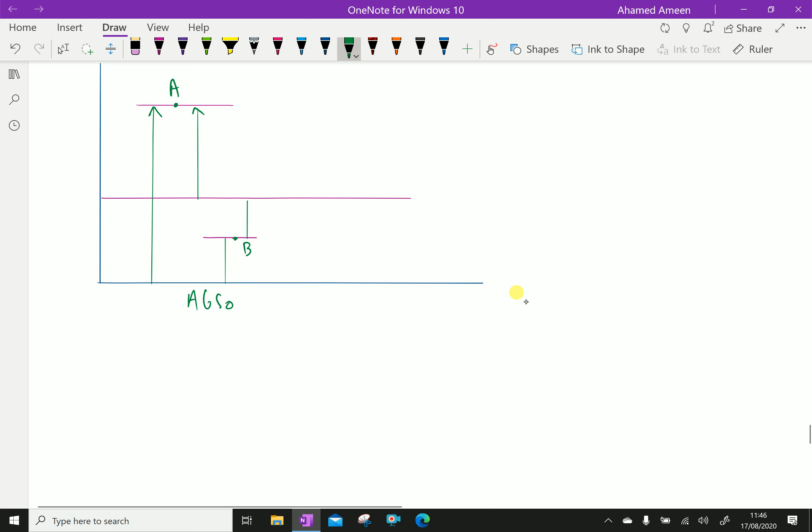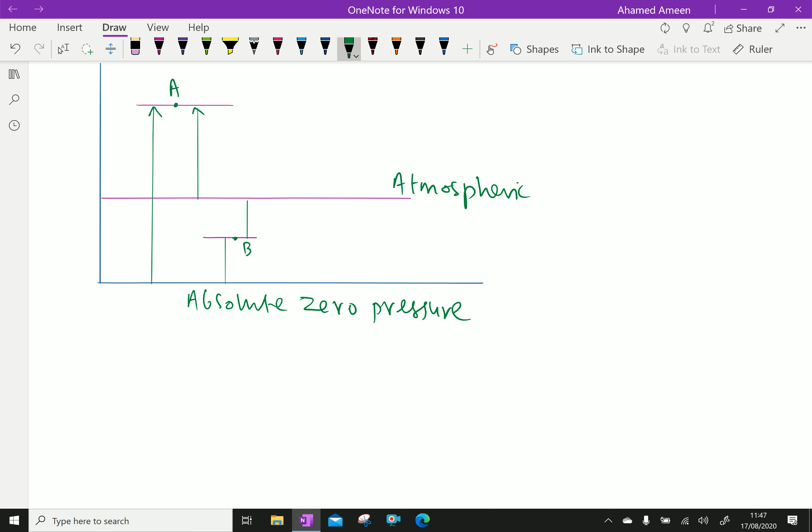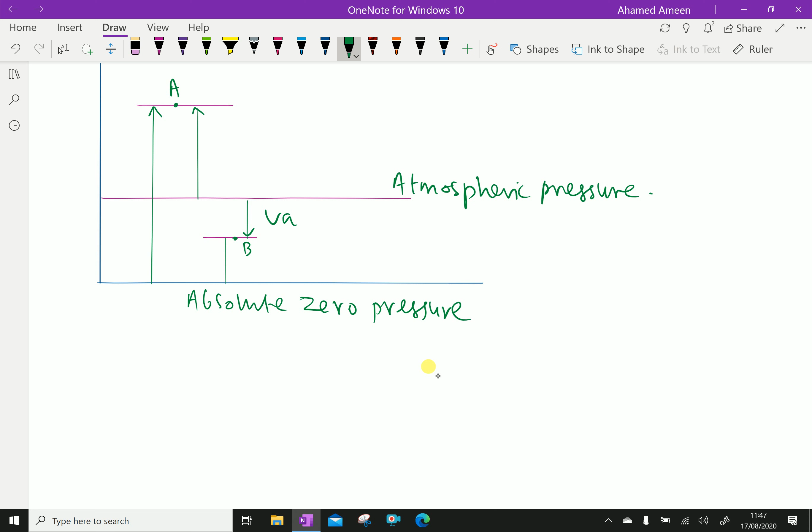Look at this figure. Let this level be absolute zero pressure. Now this is atmospheric pressure here. This one is vacuum pressure. Here this is gauge pressure. This is absolute pressure.

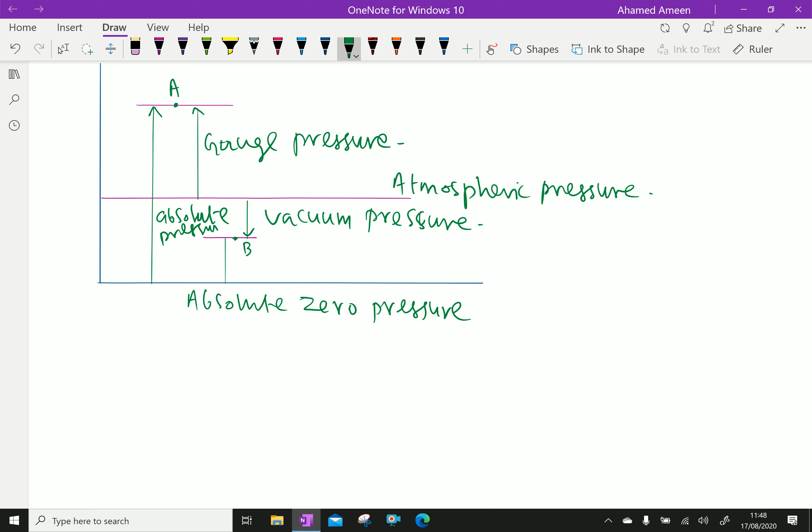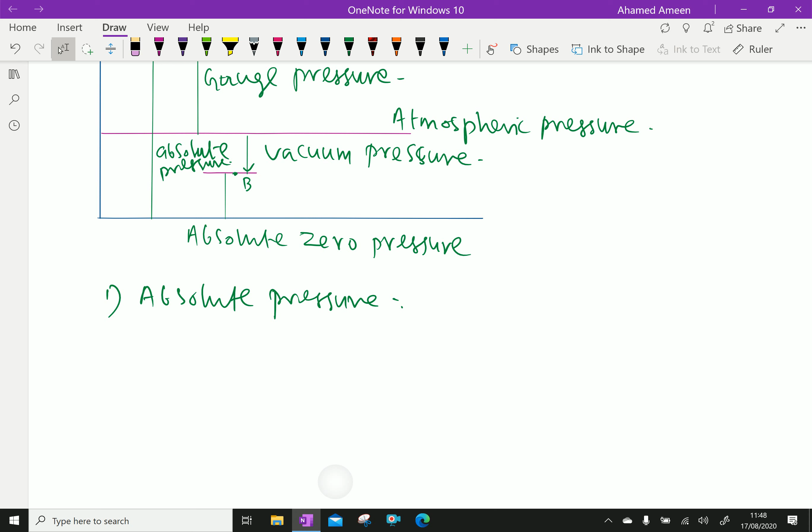Now, first we'll discuss absolute pressure. Absolute pressure is defined as the pressure which is measured with reference to absolute vacuum pressure.

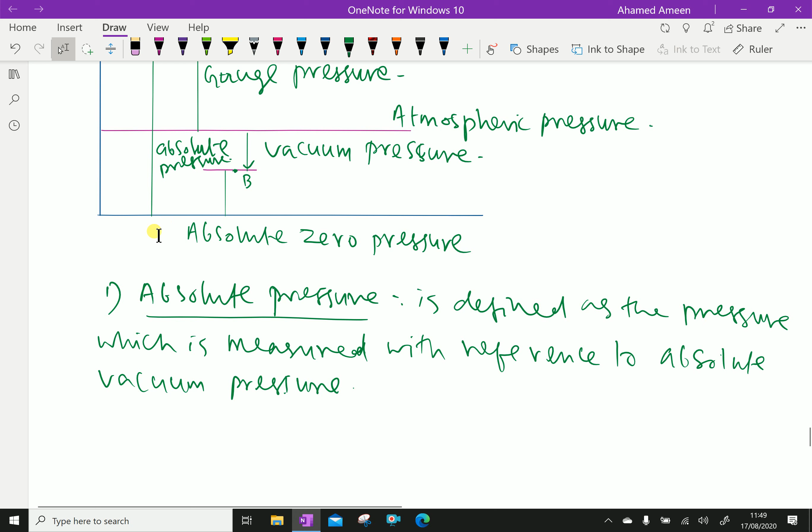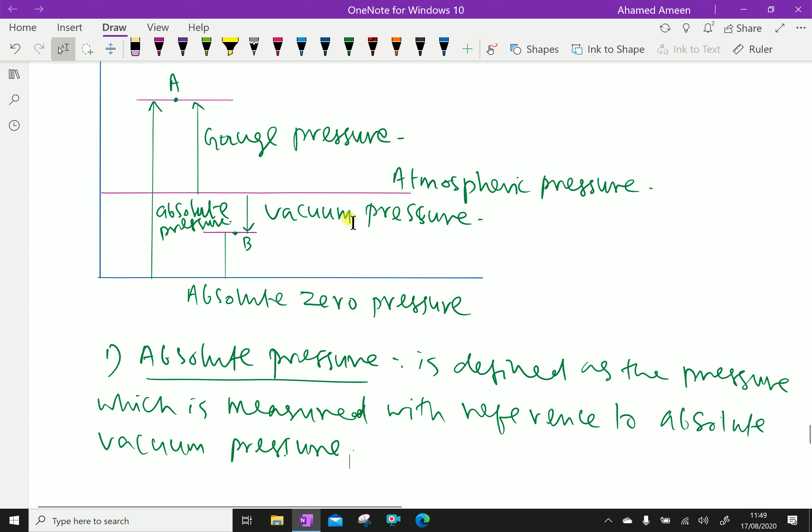With respect to vacuum pressure, absolute pressure is defined. That means here absolute zero pressure is here, and from the vacuum pressure it is down. Next, gauge pressure.

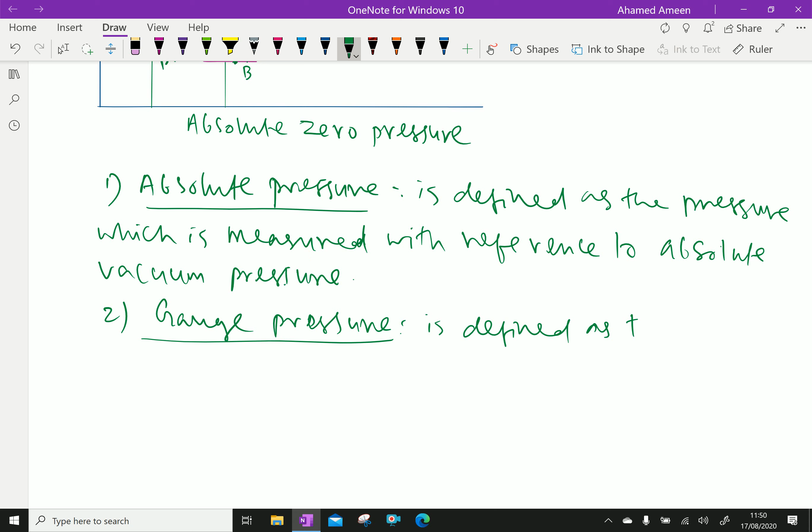Gauge pressure is defined as the pressure which is measured with the help of a pressure measuring instrument. That means by using a pressure gauge or manometer we can measure the pressure inside the volume of some tank or inside machineries. That is called gauge pressure.

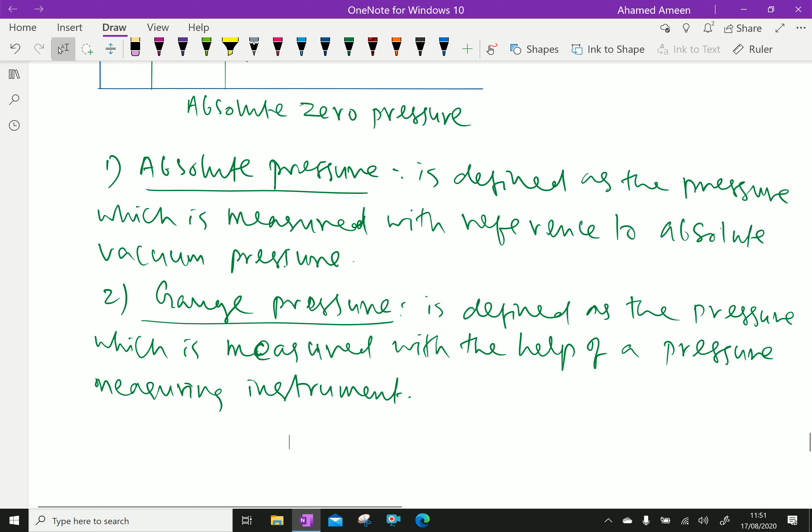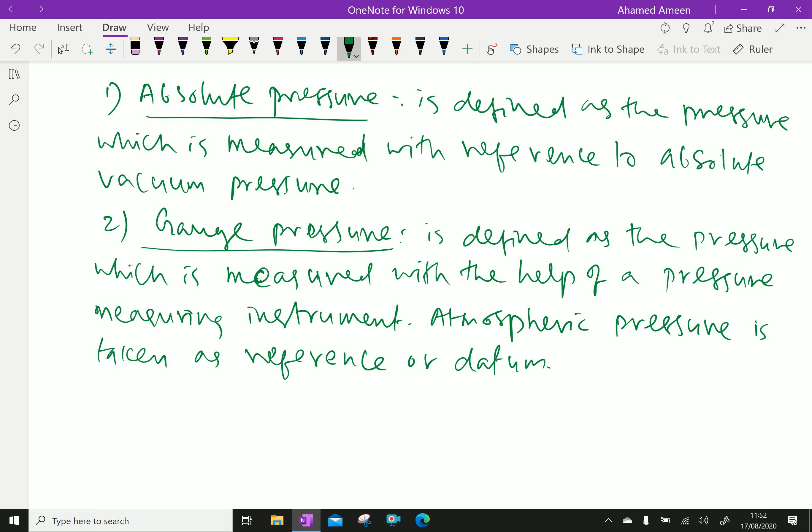Here the atmospheric pressure is taken as datum for this gauge pressure, taken as reference or datum. That means the gauge pressure is measured above atmospheric, how much it is, with the datum of atmospheric pressure. That is called gauge pressure.

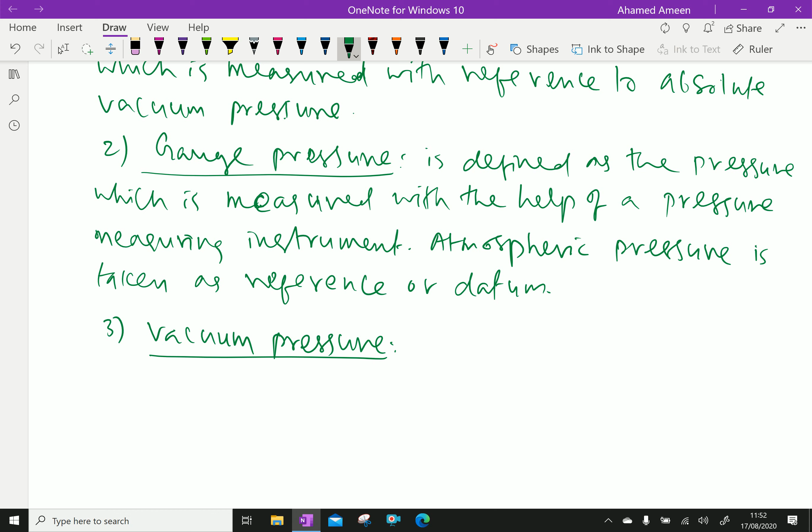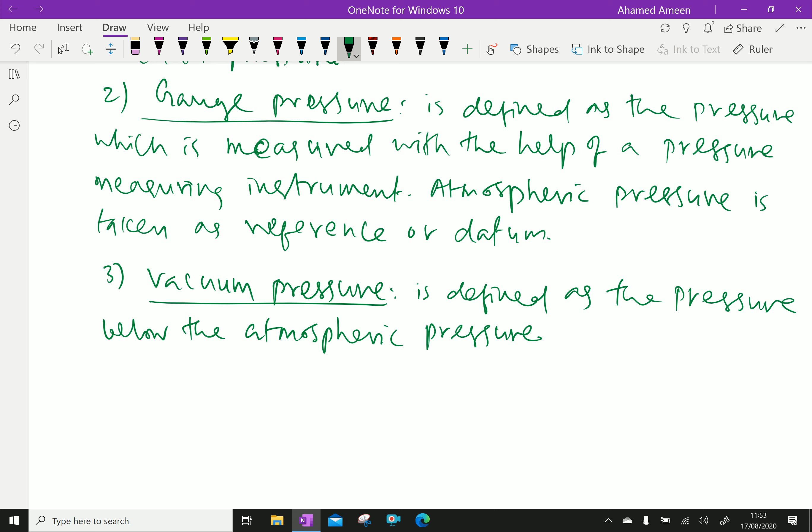Then third, vacuum pressure. Vacuum pressure is defined as the pressure below the atmospheric pressure. This vacuum pressure is here, so it is measured below the atmospheric pressure.

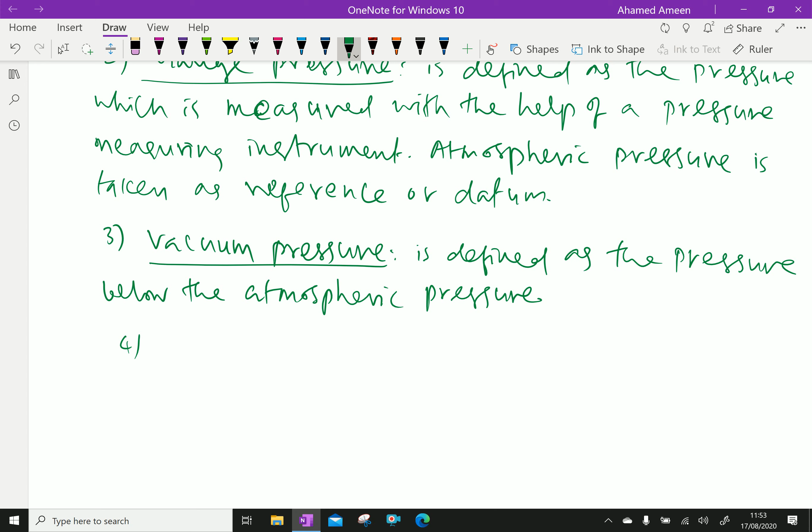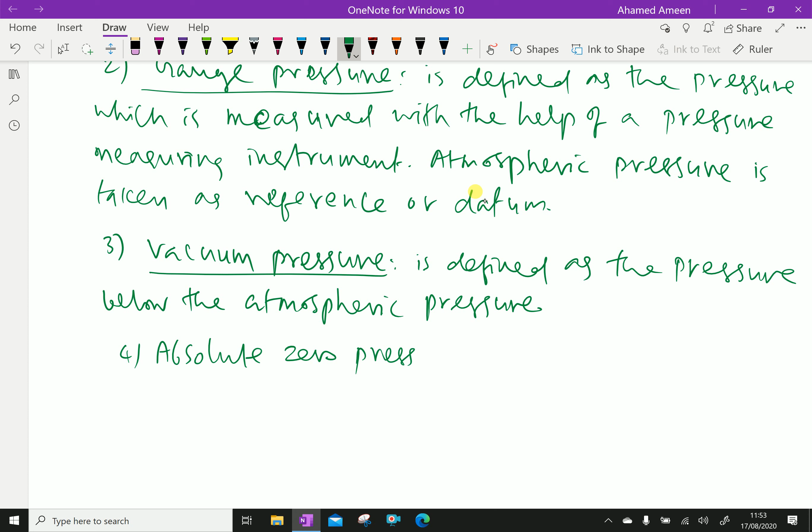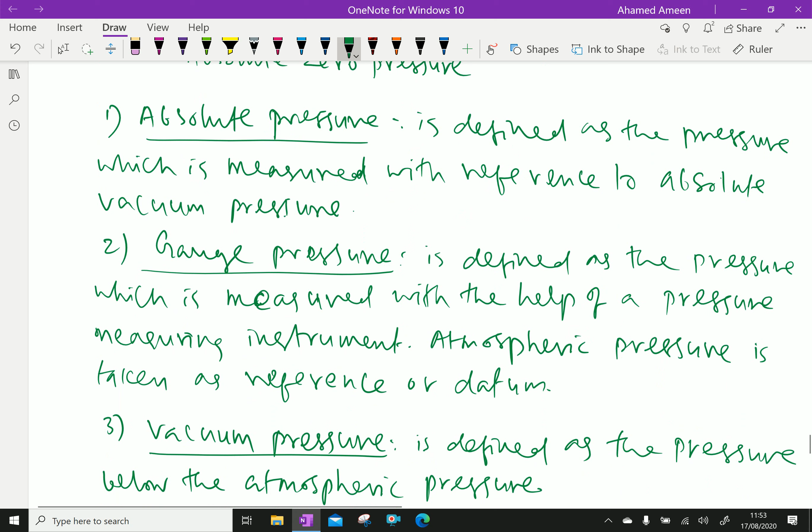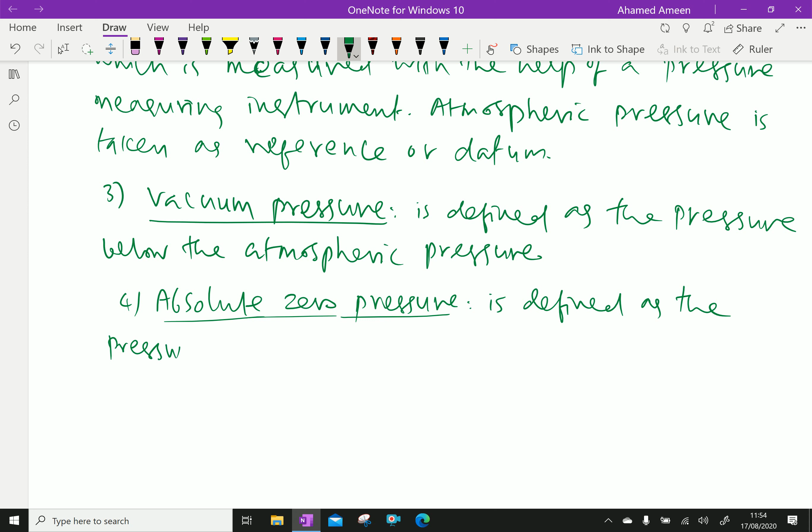Fourth one, next is absolute zero pressure. Absolute zero pressure is measured further below the vacuum pressure. Actually it is well below, meaning after that we cannot reduce pressure further, at this pressure all molecules are inactive. That is called absolute zero pressure.

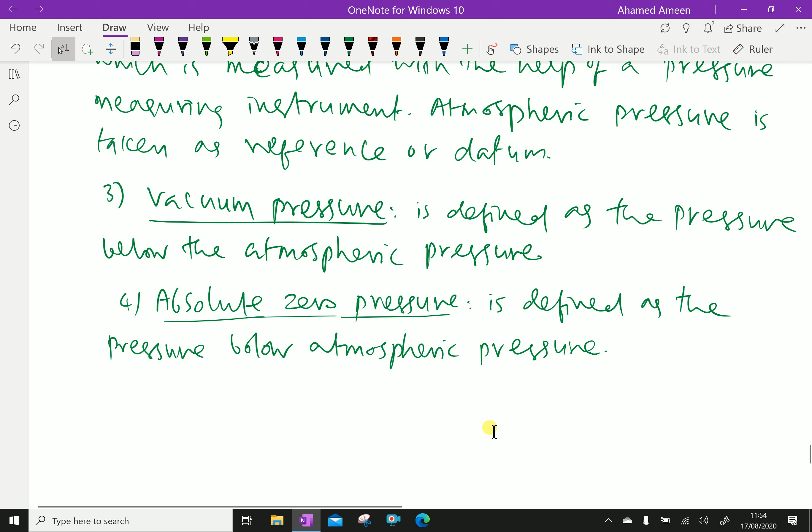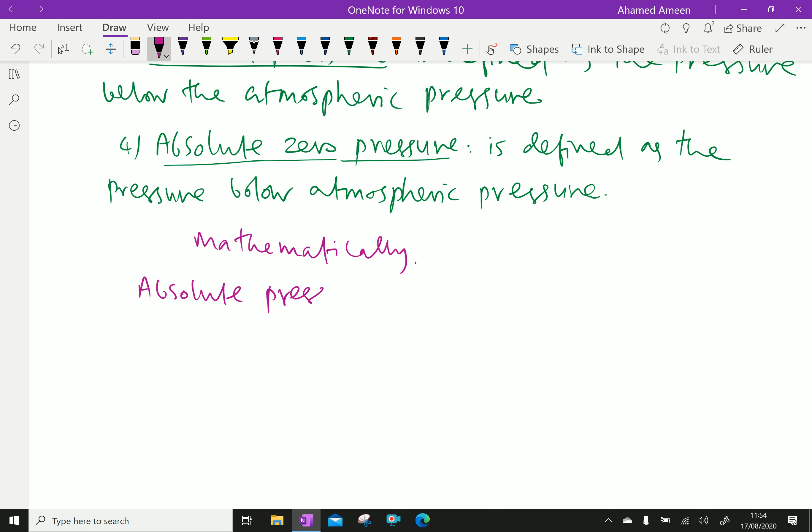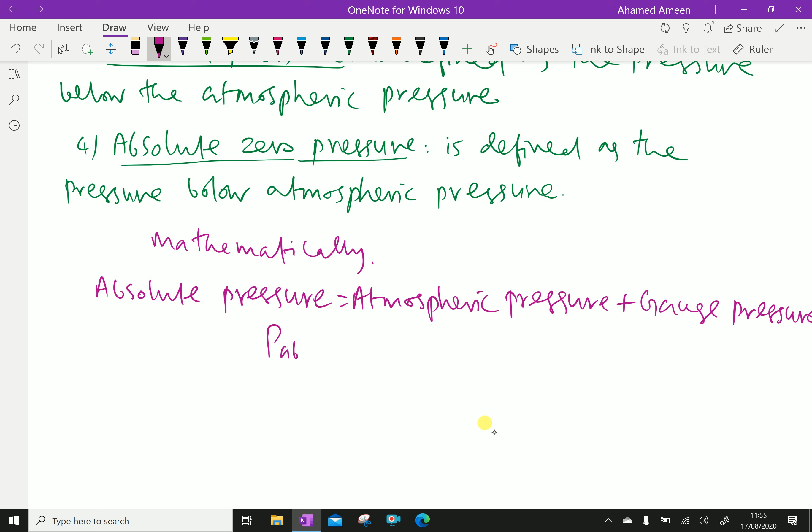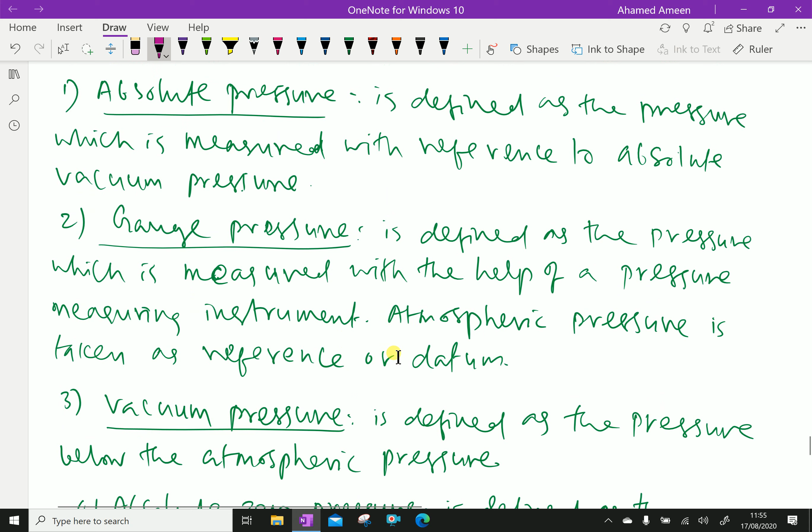Now we can mathematically define all these things. Mathematically, absolute pressure is equal to atmospheric pressure plus gauge pressure. That means P absolute equals P atmospheric plus P gauge. Here absolute pressure is atmospheric plus gauge.

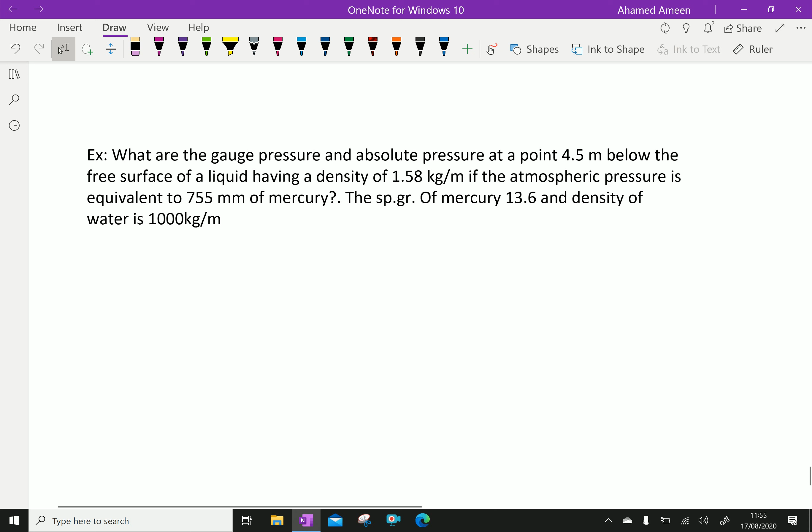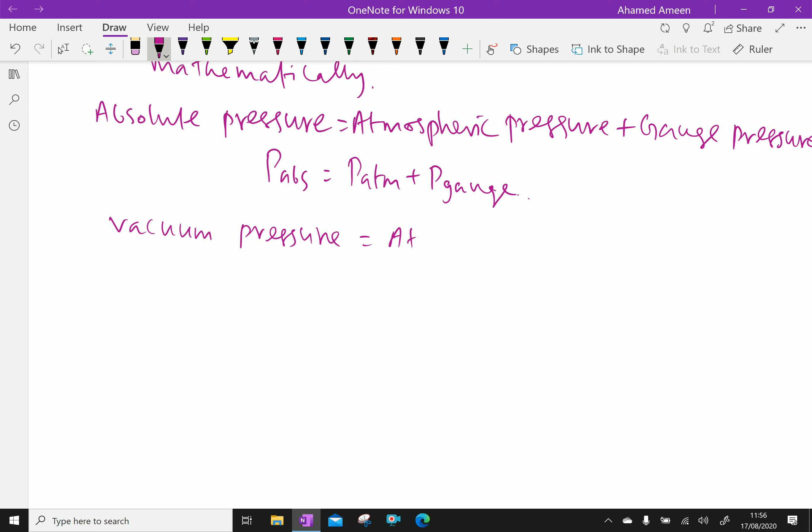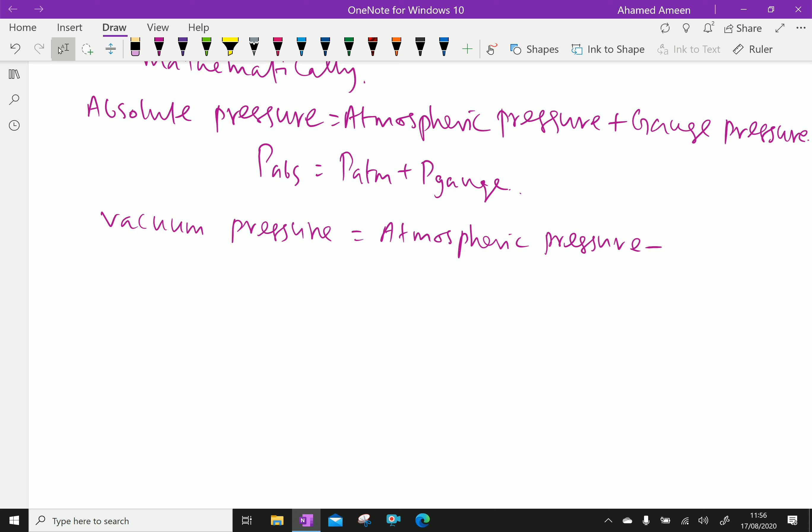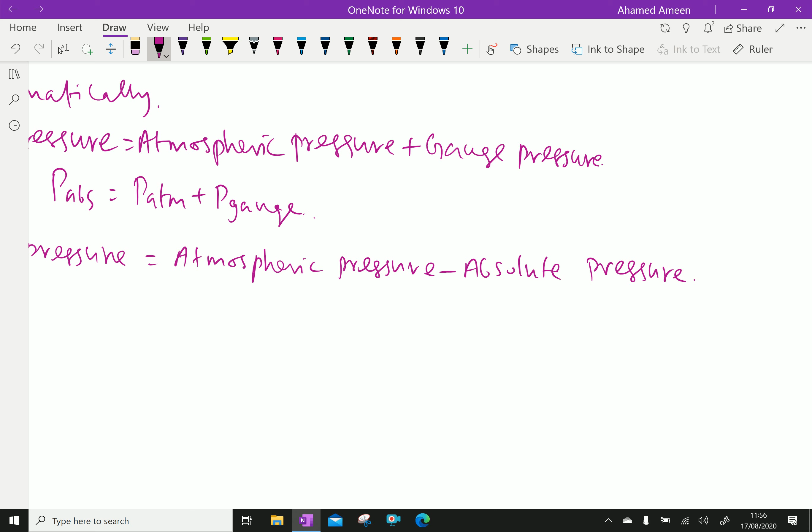Next is vacuum pressure equal to atmospheric pressure minus absolute pressure. You can write P vacuum is P atmospheric minus P absolute.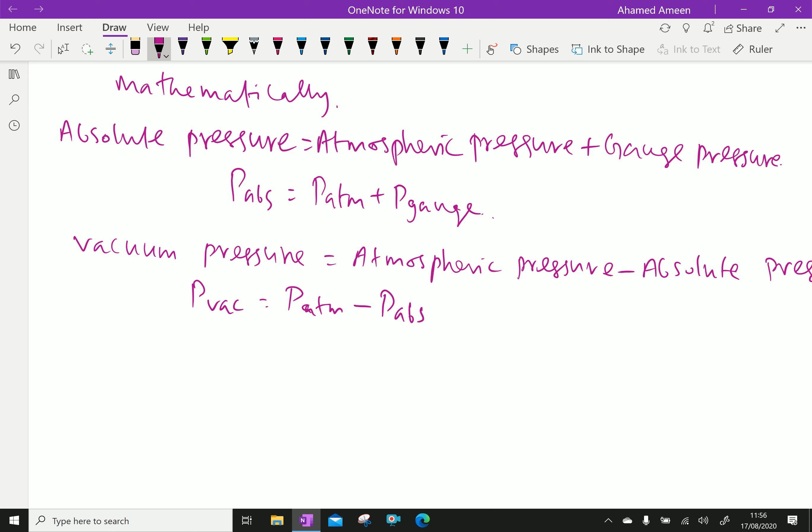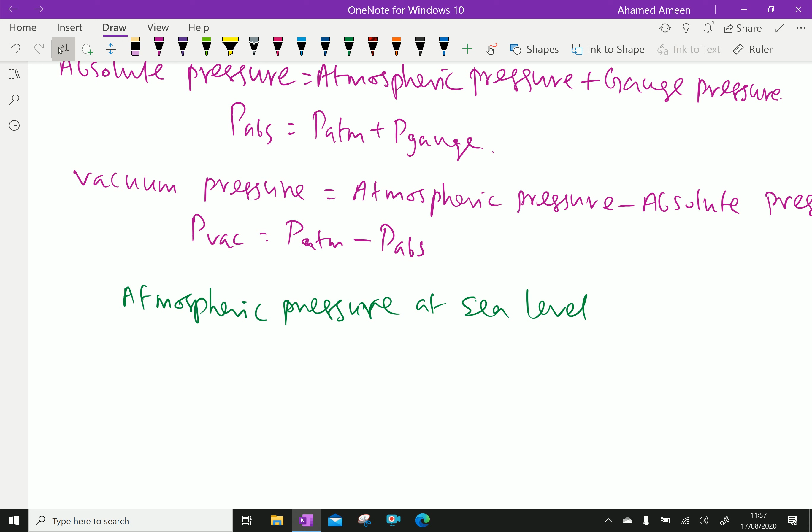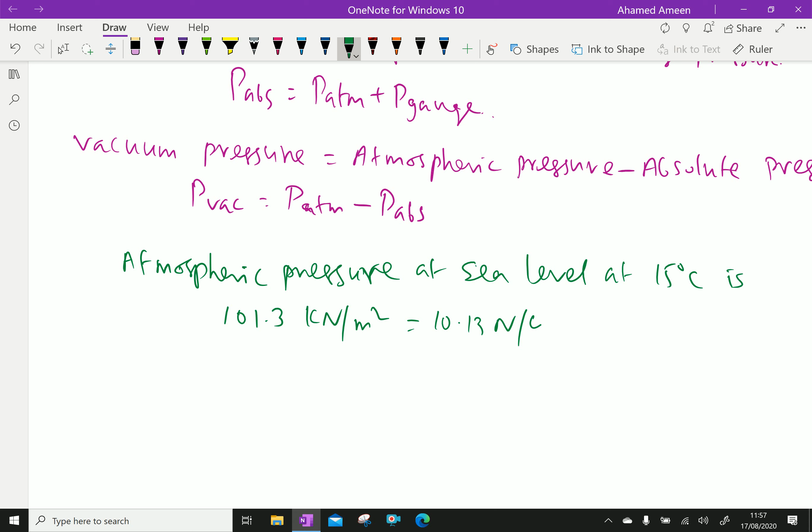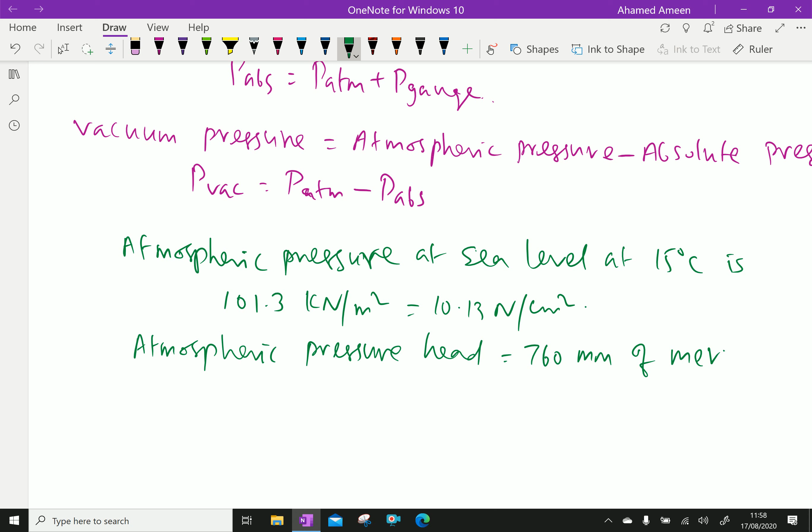Atmospheric pressure at sea level at around 15 degree Celsius is 101.3 kilonewton per meter square, which is equal to 10.13 Newton per centimeter square. And atmospheric pressure head is around 760 mm of mercury or 10.33 meter of water. This is atmospheric pressure.

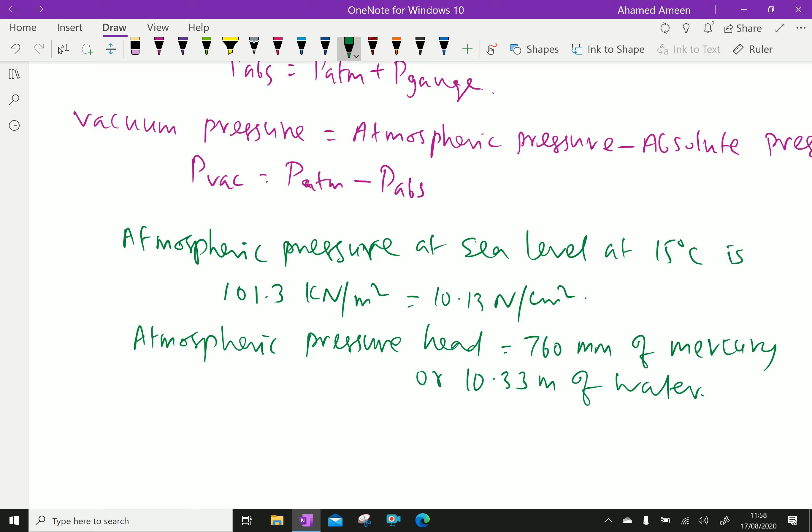Now let us do one problem regarding this. What are the gauge pressure and absolute pressure at a point 4.5 meter below the free surface of a liquid having a density of 1.58 kg per meter cube, if the atmospheric pressure is 755 mm of mercury, the specific gravity of mercury is 13.6 and density of water is 1000 kg per meter cube. Now let us solve this problem.

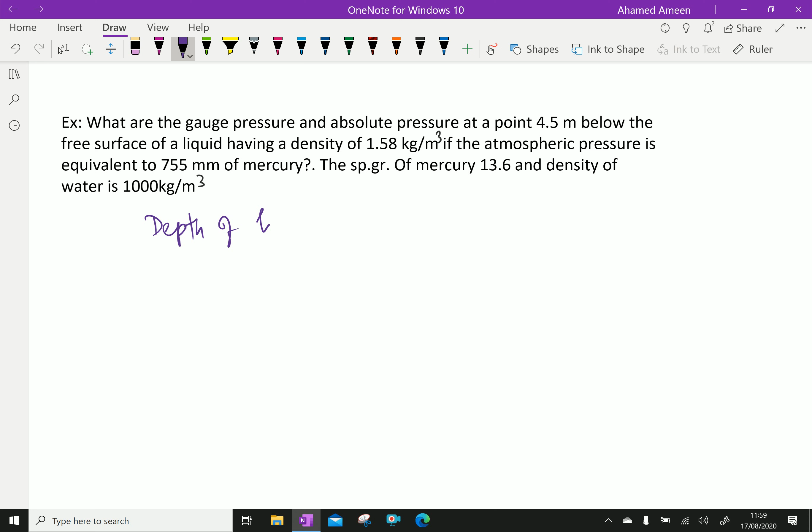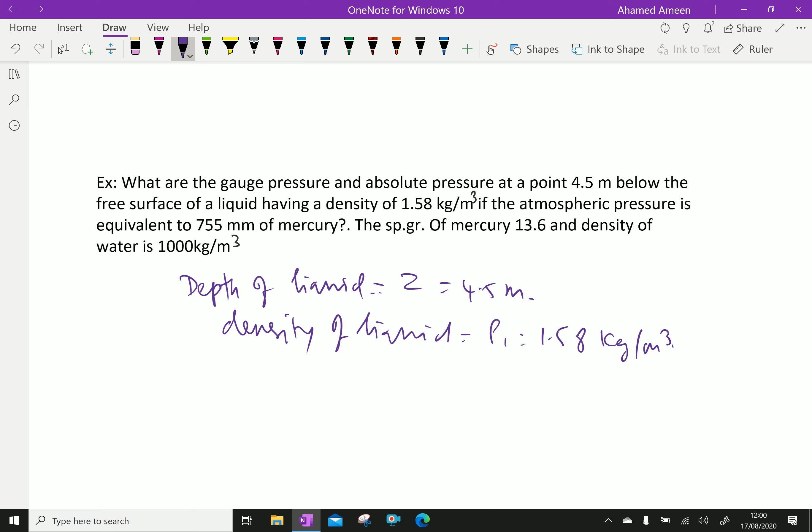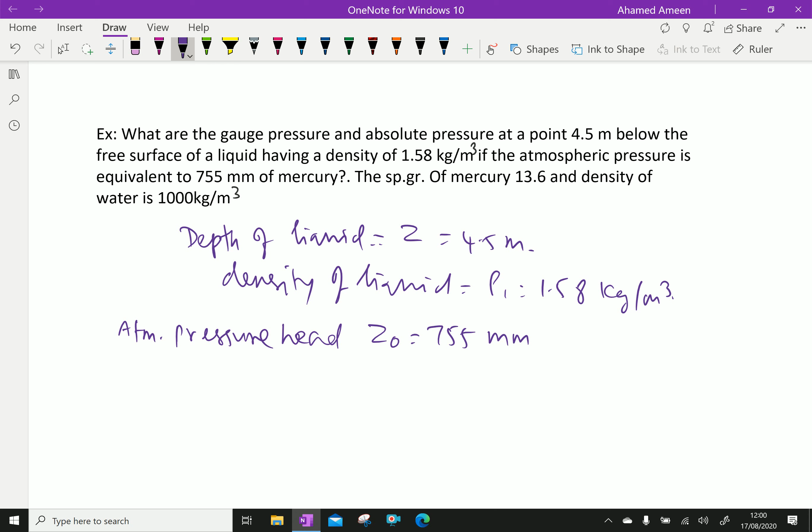First, depth of liquid, that is Z equal 4.5 meter. Density of liquid equal rho, given as 1.58 kg per meter cube. Atm, that is atmospheric pressure head, Z0 equals 755 mm of mercury, which is equal to 755 over 1000, that is 0.755 meter of Hg.

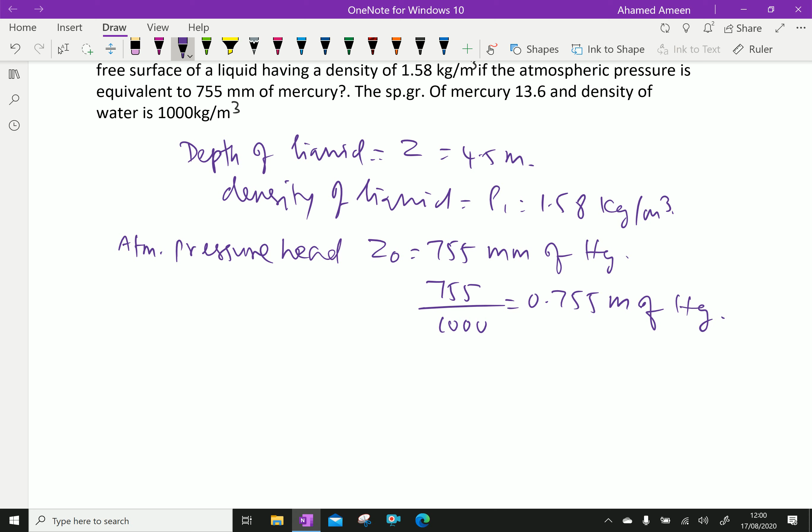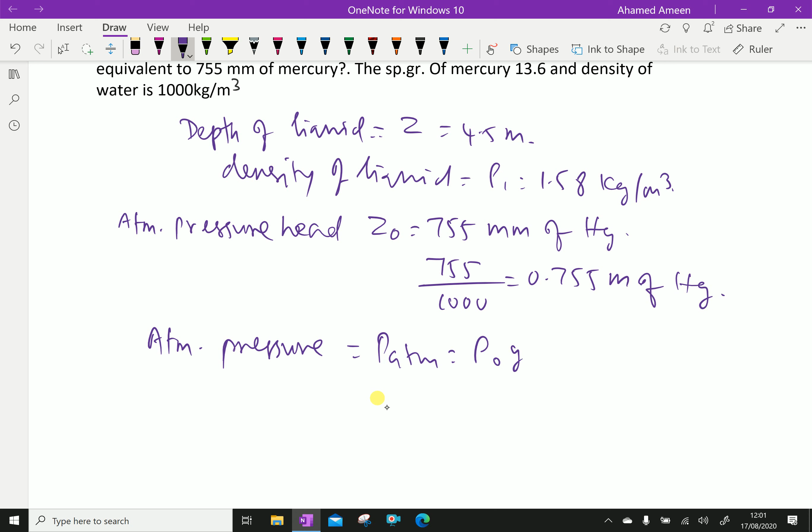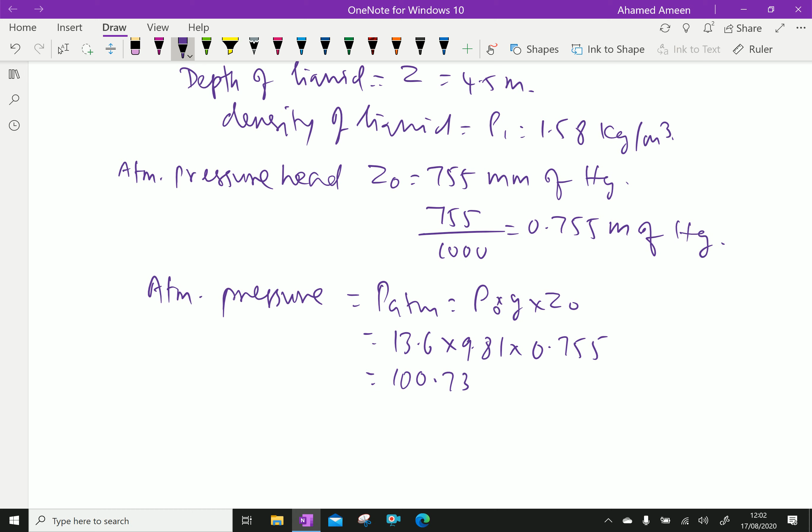Now atmospheric pressure, P atmospheric equal rho0 G Z0. Rho0 is 13.6, rho of mercury 13.6, G is 9.81 and Z0 is 0.755. Let us calculate: 13.6 into 9.81 into 0.755 equal 100.73. Since specific gravity is 13.6, density is 13.6 into 1000, giving 100730 Newton per meter square.

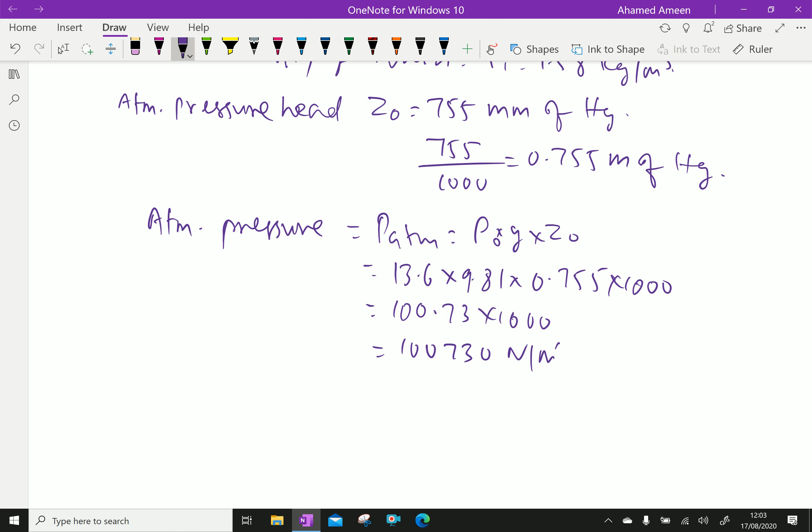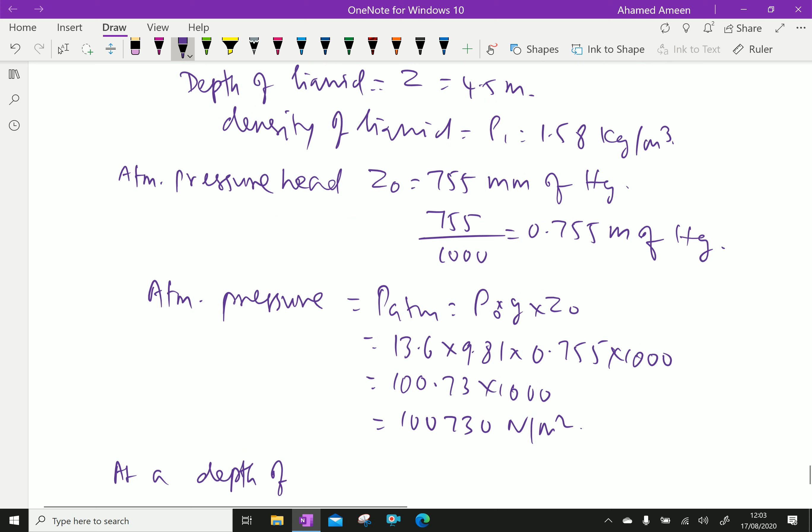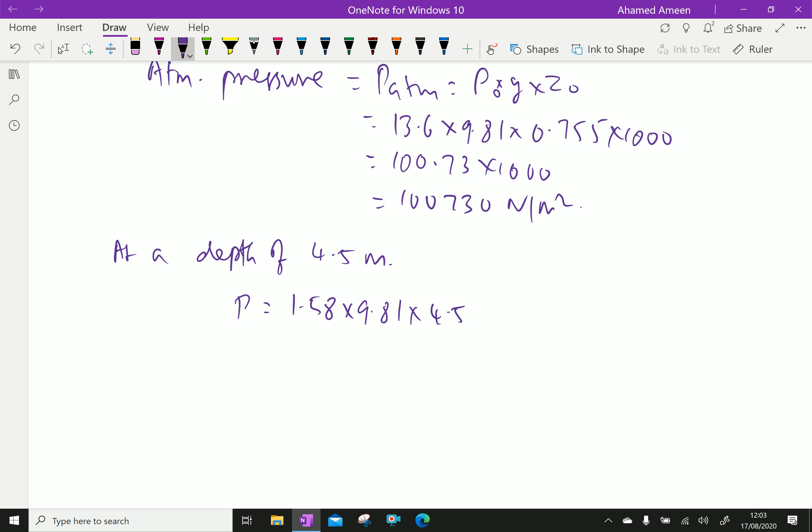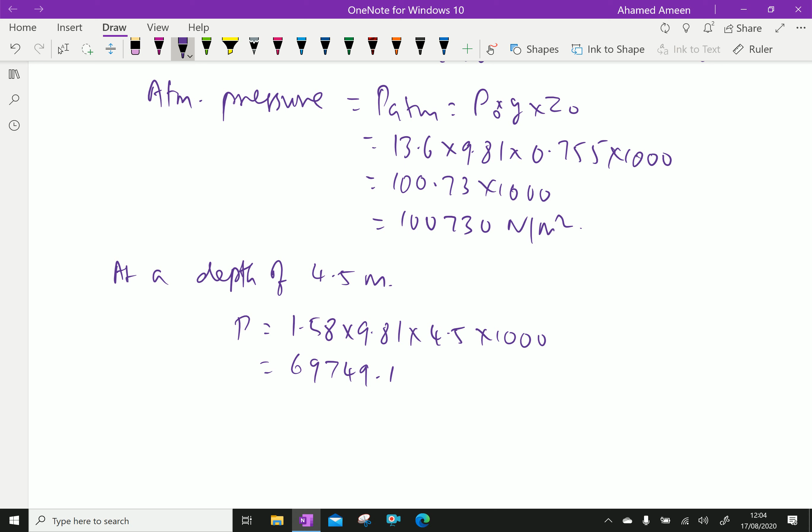Therefore, pressure at a point at a depth of 4.5 meter, that pressure equals density rho g h. Density is 1.58, and g is 9.81, into 4.5, into 1000, because specific gravity requires multiplication by 1000. Calculating: 1.58 multiplied by 9.81 multiplied by 4.5 multiplied by 1000 equal 69749.1 Newton per meter square. Therefore, gauge pressure is...

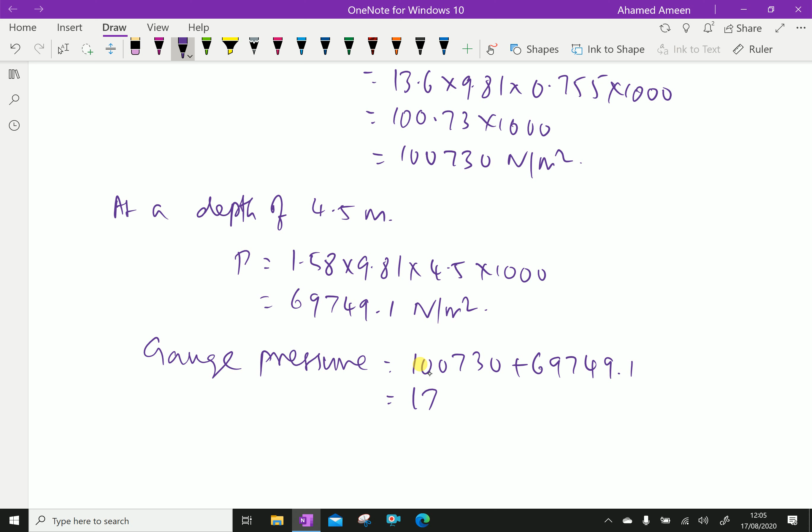Gauge pressure is 100730 plus 69749.1, which is equal to plus 100730, equal 170,479.1 Newton per meter square. So we got the final answer.